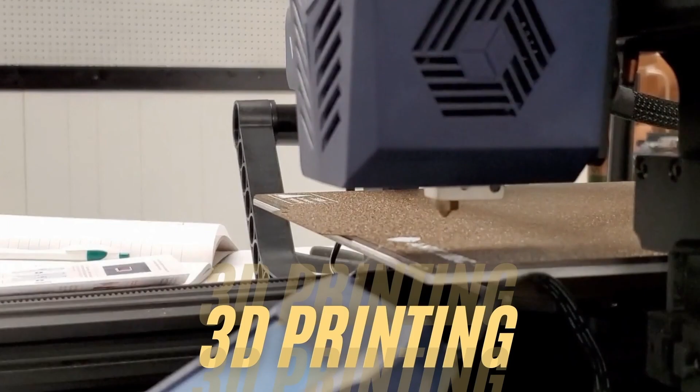Into depth on how to set up the Prusa Slicer for the use of the Anycubic Vyper. In our previous video, we showed you how to optimize Cura Slicer for Vyper. Some of you were a little intimidated by all the options Cura had, so we are making this video for anyone who may be new to 3D printing. Before we turn it over to Will, I will be going over a few Prusa setup basics. This will be all you need to get started using Prusa Slicer with your Vyper.

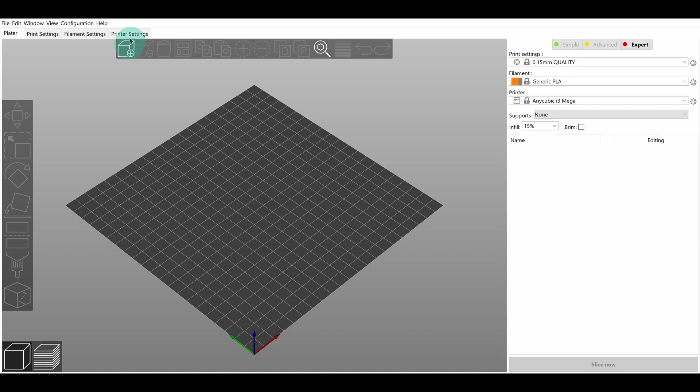The first step will be going into prusa3d.com. Click on the Software tab and then Drivers and Firmware. Select the drivers and apps for the latest version of the Prusa MK3S, in our case MK3S Plus. Once it's downloaded, open the program and you should see this image. Okay, so first things first, we have to configure it for the Vyper. In the top right corner right here, you will see three options: Simple, Advanced, and Expert. Set it to Expert. And then over here on the left, you'll see Printer Settings.

We will set the bed shape to, on X, 245, and Y will also be 245. And then come down here, click OK. And then our max print height is 260. And then you will come over here to Print Settings. Come right here to Speed. And then we're going to change our perimeters. So our perimeters are going to be 45.

Our small perimeters are going to be 25. Our external perimeters are going to also be 25. Our infill is going to be 80. Our solid infill is going to be 80. And then our top infill is also going to be 80. And then our bridges stay at 40 and 30. And that's all you'll do for over here. So these changes should enable you to get started printing most objects. I encourage you to watch the rest of the video to become familiar with the Prusa Slicer and how you can fine-tune these settings for even better prints.

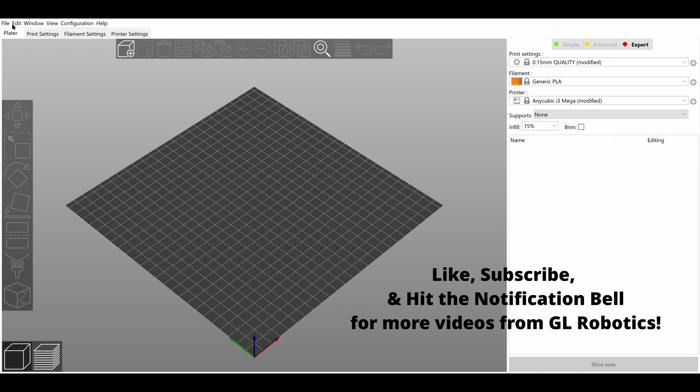In the upper left we have the file menus with our File, Edit, Window, View, Configuration, and our Help. On the far right we have our Print Setting menu, Filament, and Printer panels with the Profiles drop down. We also have the Support and Infill percentage settings with the brim. Below this we have the file list. In the center we have our build plate with our workspace. Just above this we have our quick toolbar with the load, delete, copy, paste, split, search, enable variable layer height, and the undo redo buttons.

Over to the middle left we have the model toolbar with move, scale, rotate, place on face, cut, paint on supports, and seam painting. The two bottom icons in the corner being your 3D view and the layer preview button. And finally the bar just below the file menu. We have the Plater tab with our main workspace. Next to it we have the print setting tab, the filament setting, and finally the printer setting tab. We'll take a closer look at this shortly. Now that we're a little more familiar with the layout, first thing we're going to do is run through the configuration wizard.

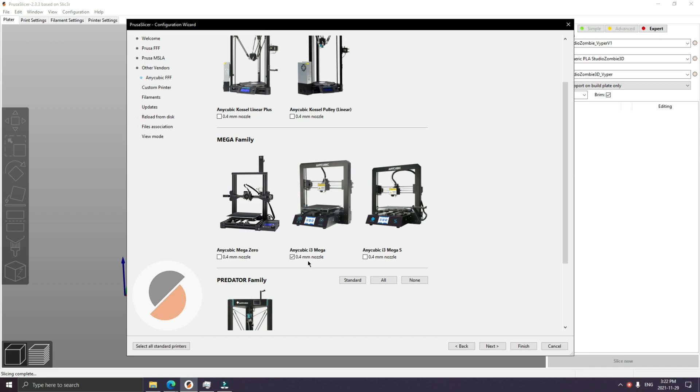Click on Configuration and then we're going to click on the wizard on top. Here we're going to add our printer. In my case it's the Anycubic Vyper. It isn't listed, but I'm going to use the i3 Mega. Underneath printers we have the filaments tab. This is where you can pick your brand and type of filament. If you don't find your brand listed, you can just use the generic options for now. Next, underneath is the updates tab. Nothing really has to change here, as well as reload from disk.

Next, under that, we have the file association. That can stay as well. And then under view mode, I like to have it set to advanced mode. Click finish. Now that we are back at the main workspace, we will take a look at loading a profile and settings. First, click on the File menu. Then go down to the Import tab. Click on Import Config. Then select the profile file you have saved. In my case, my Vyper profile here. Click on Open.

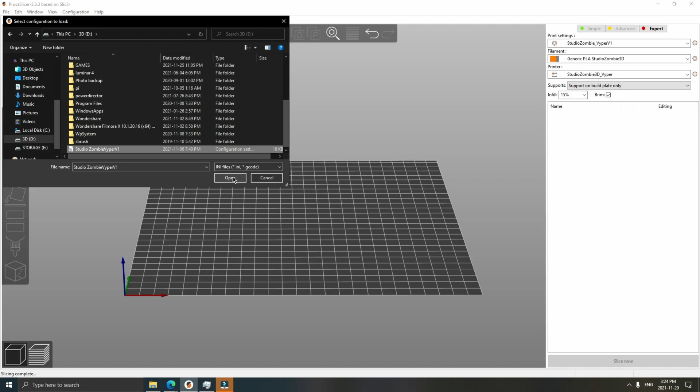Alright, now that we have our profile loaded, let's take a look at the actual print settings. From the main screen, we're going to click on the print setting tab right above here. And here's the print setting tab itself. Right below that, we have our profile tab where we can drop down the menu for our various profiles. Below that, we have our various settings. First, let's take a look at the layers and perimeters tab. Here is where we're going to set our layer height, the number of perimeters, also the number of bottom and top layers our prints are going to have. Below this, we have the quality and the advanced options, such as the seam position.

Next, we have our infill settings. This will be where you adjust the infill density, the pattern, and the overlap settings. You will also find the ironing options here, print time reduction settings, and the advanced infill options. Be sure to check out the various infill options available to see what works best for you.

Continuing down, we have the skirt and brim settings. First, we have the number of loops for the skirt, the distance, as well as the draft shield options, the brim, and then the width of the brim itself.

Moving down into our support material tab, we have our various support settings. First, the generate support option and the overhang angle. Under that, we have the raft layers. At the bottom here, we have other options for the support material and raft, the Z contact distance, support pattern, as well as the spacing options. We will explore supports in a future video, so stay tuned.

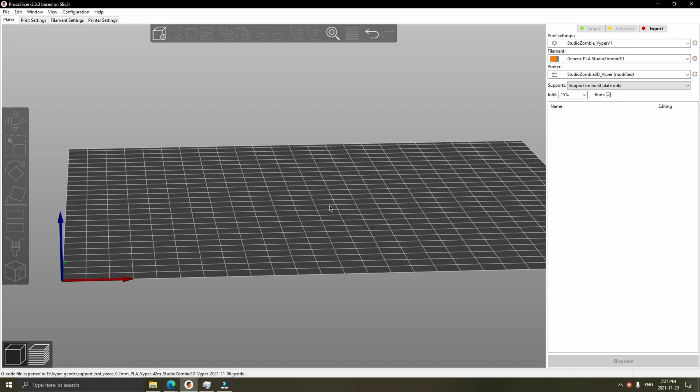Okay, now that we're a little more familiar with Prusa Slicer, let's load, slice, and save a file. Just like our last video, I'll be loading a support test piece from the link in the description. Select the file, and then click Open. Our model is now loaded on the build plate, but we need to change the orientation. You can click the rotate in the middle left toolbar or place on face. Let's use the second option, place on face.

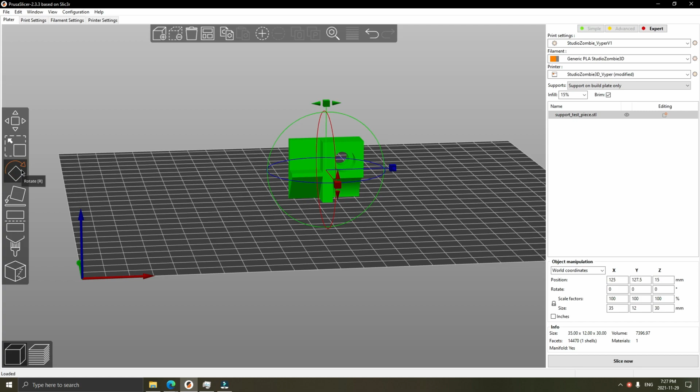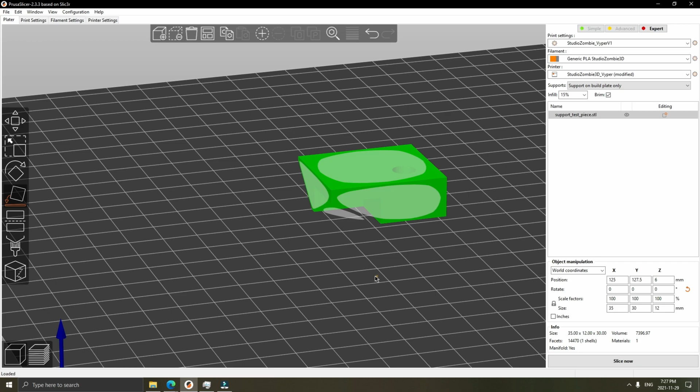You will notice some parts will show up here in patches. Click on the side you want to align to the bed. There we go. Now it's ready to go. Next, on the right side panel, we will need to make sure our supports are enabled. I just use the ones touching build plate for this print. The infill at 15% will be more than enough for this print itself. I also like to check the brim to make sure my prints stick really well.

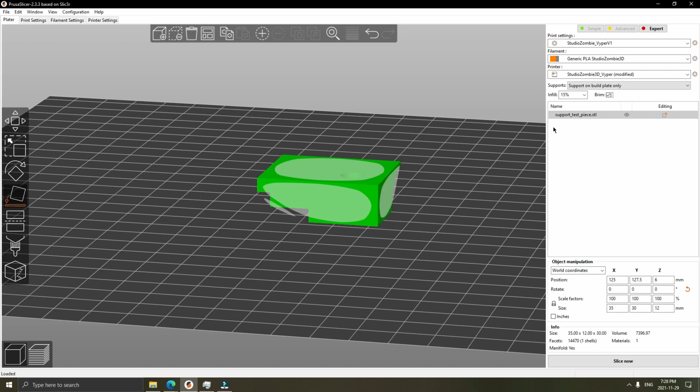Alright, now that we have it oriented right, and we have our support and our brim enabled, we can click on Slice. Once it's finished slicing, it'll switch to the preview mode, just like this. In the upper left, you will find the feature time information. This will tell you how much each part of the print will take to print. The slider to the right here will let you go through the different layers and check your print. This way you can see the supports, the infill, and the walls all separately here.

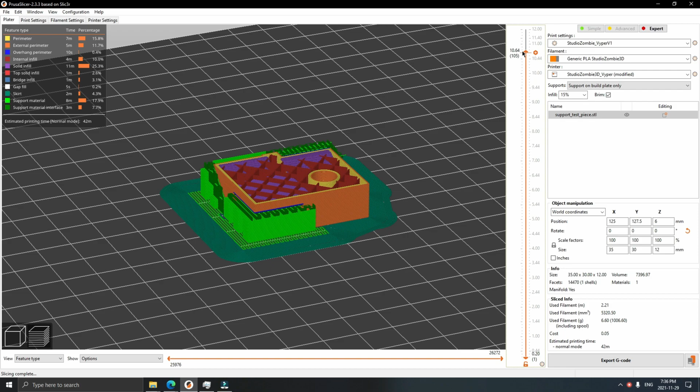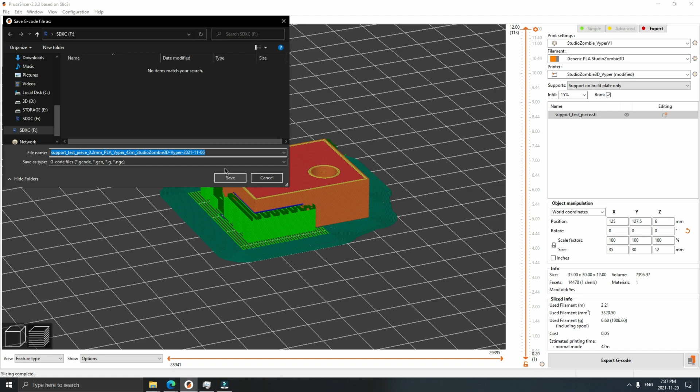To the bottom right, we have our sliced information with the filament used, cost, and time. Now we can click Export G-Code, and Save. In my case, I'm going to be saving to the removable media. Click Save, and we're done. Be sure to eject the SD card, and then we'll jump over to the printer.

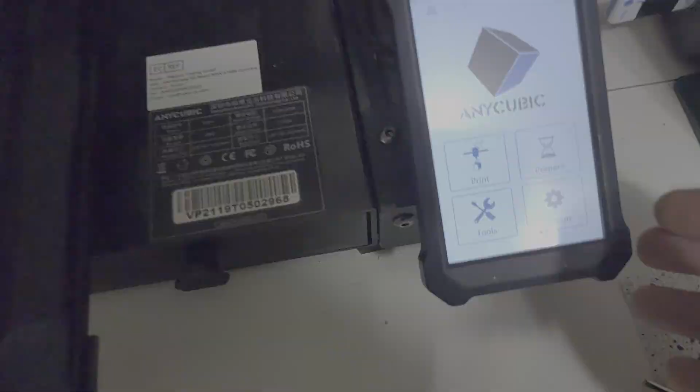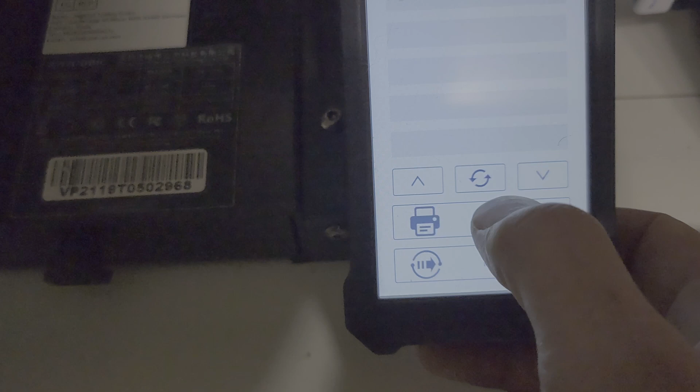Alright, over at my Anycubic Vyper, I'm just going to load the SD card into it. There we are. And then I'm going to hit Print, select the file, hit our Print button, and off it goes. Now, after about half an hour, your print should be finished and ready to pull off the bed. And there it is, ready to go.

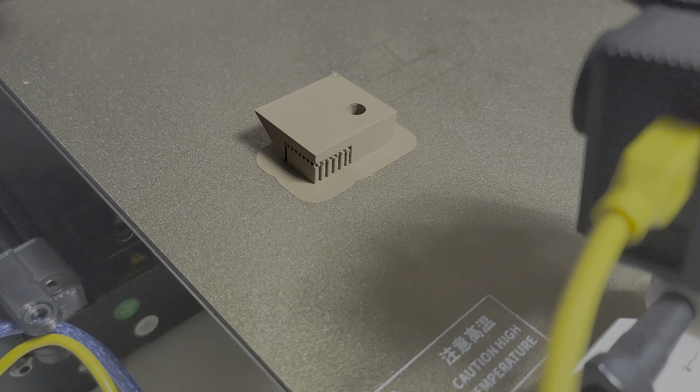Alright, now that your print's finished, pull it off the bed and take a look. That's it. You just loaded, sliced, saved, and printed with PrusaSlicer. Load your next file, slice, and print.